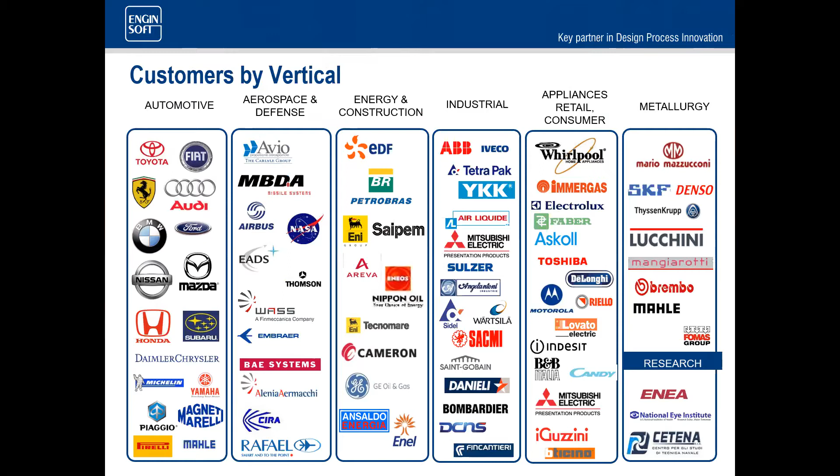So we're experts across dozens of industries. We have multidisciplinary competencies and added value services, best-in-class technologies and technological transfer, training, advanced on-the-job and support, research partner for academia and government, technological transfer projects in CAE and virtual experimentation sectors.

So some of our skills are fluid dynamics, fatigue and durability, crash and fast dynamics, process simulation, mechanics, high performance computing, tolerance analysis, environmental and vibroacoustics, multi-body, and optimization.

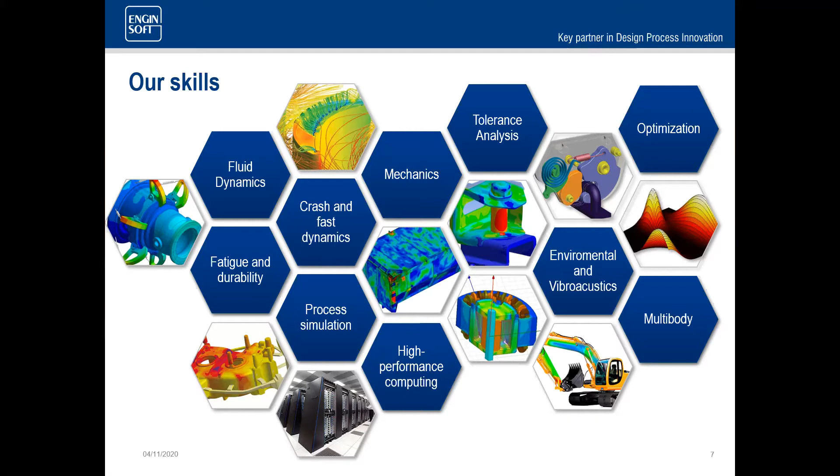So I think a little bit of a change in the schedule. I'm James Christ. I'm a senior application engineer for EnginSoft. I do a lot of our trainings and a lot of our level 2 support for Particleworks and a few of our other products. I'm going to be doing the overall slide deck, and then Chris Garcia is going to take over. He's one of our application engineers. He's going to do a live demo and show you what the software looks like and what the workflow is like for these types of problems.

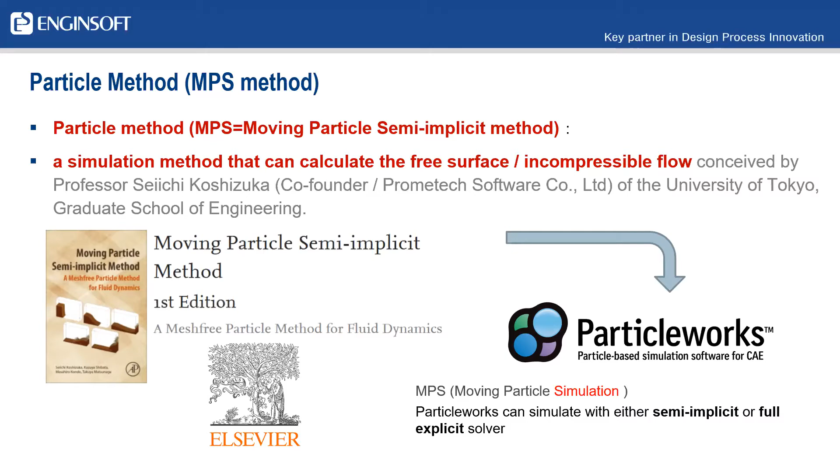So a little bit of history: the method came out of the University of Tokyo in the mid-90s, and then the person who worked on the original method went on to found Prometech, the company that manufactures and updates Particleworks to this day. So we're the only people on the market that are using this method.

Now to dive into some of the details on why it's different. On the conventional CFD side, we typically use an Eulerian approach, right? So we have a fixed grid. We might change that grid every couple of time steps if we have a moving grid type problem, but the important thing to remember is the connections between any calculation nodes are going to be essentially fixed, right? We have these lines representing how these nodes are connected, and those are going to be relatively rigid.

And then we attach calculation nodes to points in space and evaluate whatever properties we're interested in over time at a location in space. The particle methods that we're going to be talking about today, so MPS and SPH, which I'll touch on in a second, both use really the same discretization scheme. So they are Lagrangian methods.

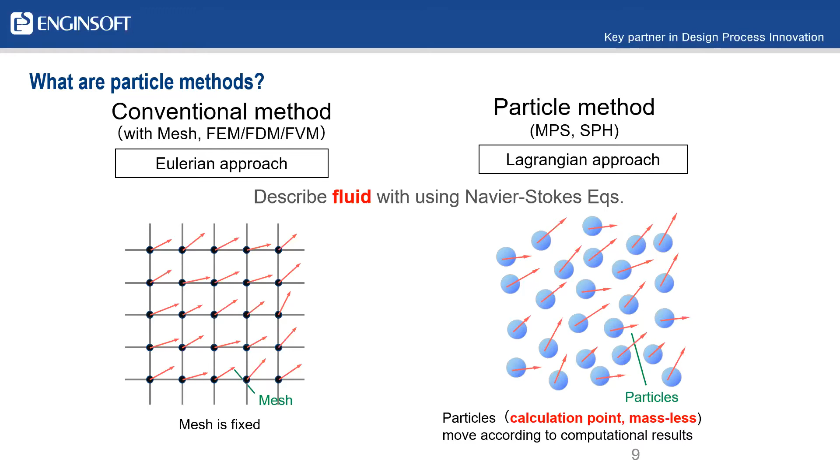They directly discretize fluid. So it's kind of like you discretize the actual volume, and then you track that volume or clump of fluid as it's moving through space. And then the calculation nodes define where your fluid is. So they're very natural ways to deal with free surface problems and sparsely populated domains in particular.

Now, once I go through that slide, the next question people inevitably ask is, well, this just sounds like SPH. I know what that is. Why is this different? And I think the best way to go over that difference is to go through the history, because that really explains where those methods came from and why they need to be different.

If we look at SPH, smoothed particle hydrodynamics for those that might not know what that stands for, it was originally developed in the 70s for the astrophysics community. So they're interested in problems like solar system formation. You might have at the beginning of the system a continuous distribution of gas, and it's going to eventually collapse down into stars and planets, right? And these problems can be modeled as highly compressible fluids.

So what they've done for SPH is they have these particles or calculation nodes that define a distribution of mass. And this is kind of what this image is showing. So it's almost like a stochastic method, right?

You have this particle and it represents almost like a cloud of fluid or dust in the astrophysics case, but it can be used for any really highly compressible fluid. And what they do is they solve this system over time. They evaluate where these particles are, and then to evaluate the end result, what you do is you take the superposition of all of these distribution functions, and that gives you a distribution of density across the domain.

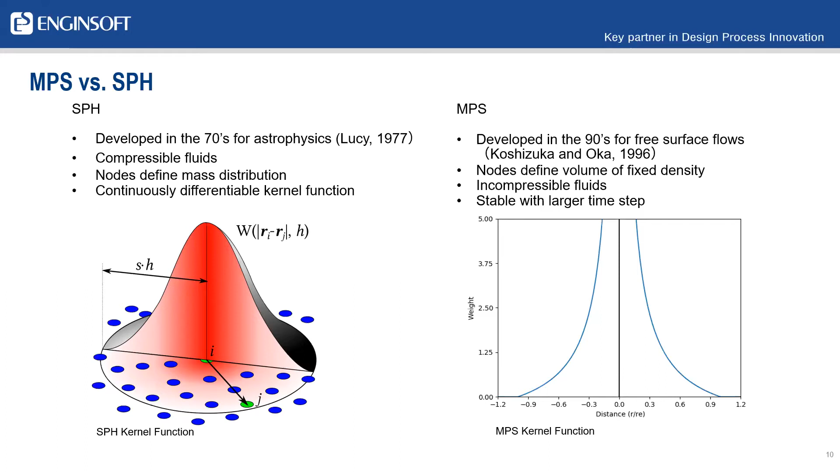Now, what does this look like for a more realistic example? Well, realistic as dam breaks, right? So I'm sure you've seen this example. We start with a volume of fluid here, and then we progress it through space. It's the quintessential first tutorial everyone does. And the difficult thing about doing this type of problem with a conventional tool is that you still need to discretize everywhere that might have fluid. So we end up with a bunch of elements here, and at every time step, they're just going to say, hey, the volume fraction is 0. So it's kind of a waste of computational resources in a sense.

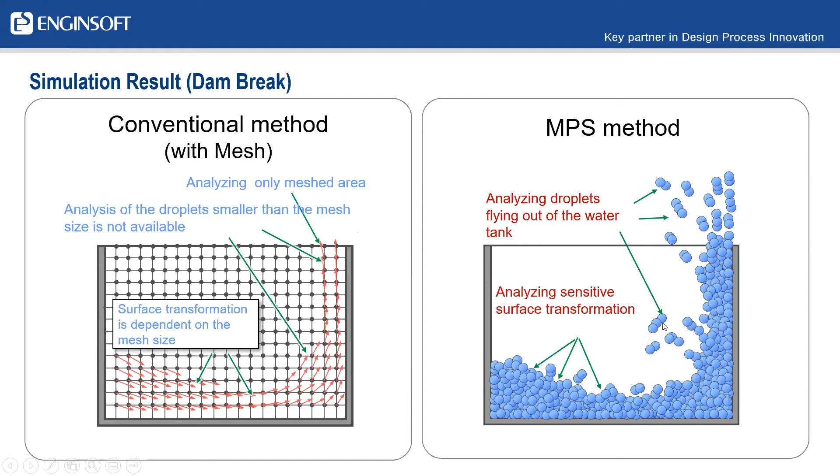And another thing is, before we start the simulation, we might not know how much splashing we're going to get and whether fluid is going to escape this container. With a finite volume code, you need to decide that in advance and discretize up. With MPS, you can just draw a larger domain, but you're only paying a computational cost for the amount of fluid you have and the size of the particle you're using. So you can draw an arbitrarily large domain and not really pay a computational penalty for doing so. You can also a lot of times use a finer resolution and have that resolution continuously throughout the domain. So some of these small features we might not have discretized small enough on this side, but we're able to resolve those features using MPS.

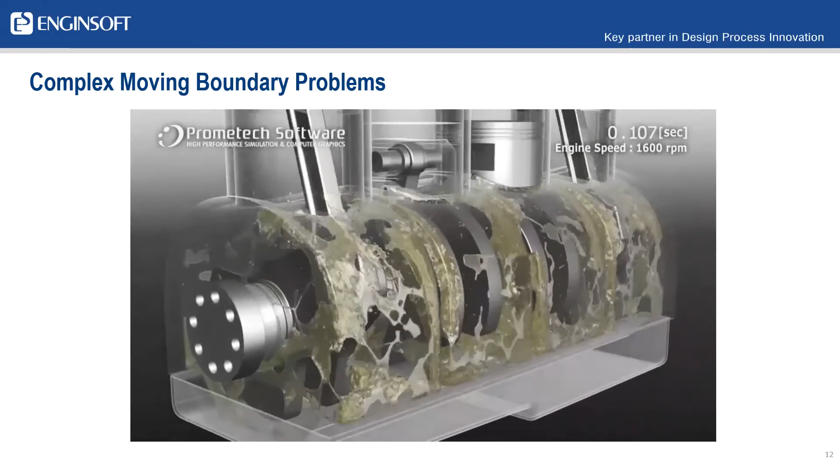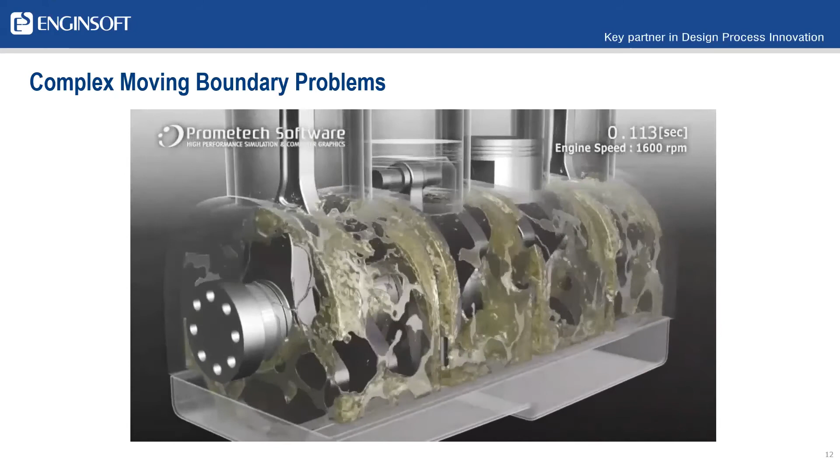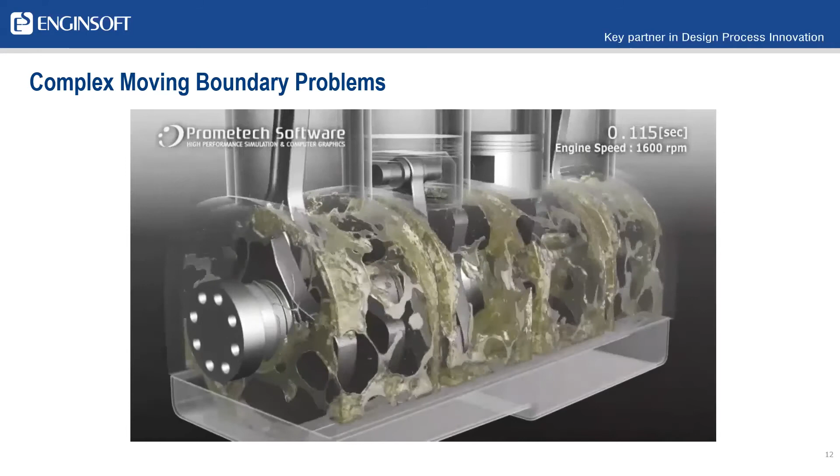Now, when we put all of this together, the really nice thing that comes out of it naturally is that we're able to deal with moving boundary problems very naturally. So because we don't have to deal with a changing grid over time, we can just say, here's a particle, here's a wall, if that wall moves, it's just going to apply an appropriate repulsive force to the fluid, and it's going to move appropriately. So there's really no additional effort required, either computationally or from the users. On a user side, you basically just tell the system, hey, this is moving, maybe it's rotating this fast, and that's about it.

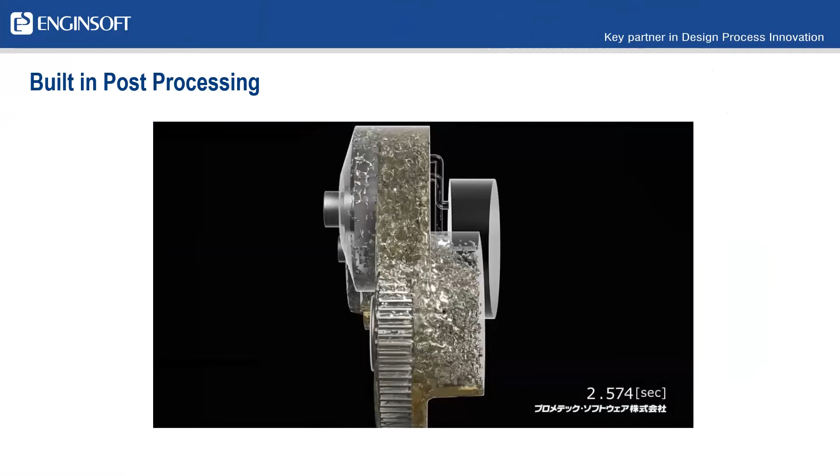And one thing I always mention, because I get this question quite a bit, is what does the post-processing look like? And that's completely integrated within Particleworks. So it's not like some other tools where you need to have a solver in one spot and then use a separate tool for post-processing. And sometimes that can create workflow issues.

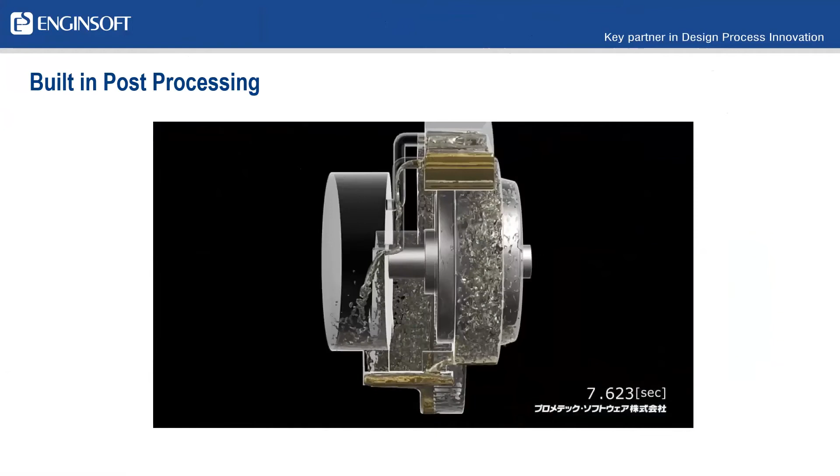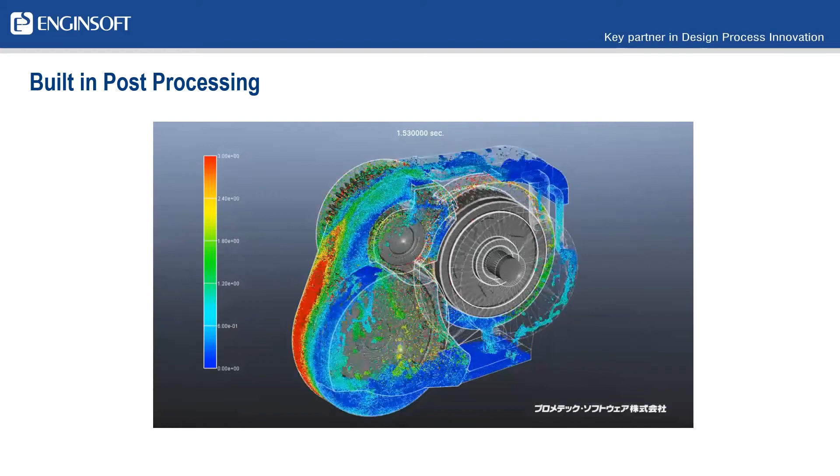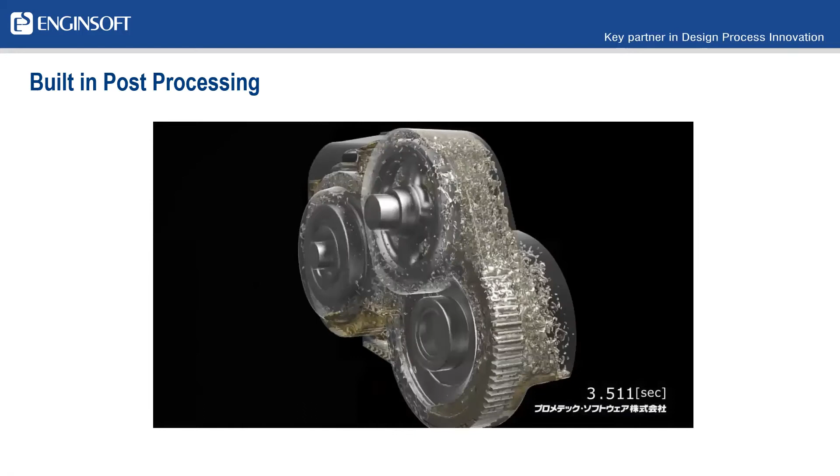There's built-in post-processing. And I think in the video that was playing before we started, while we were waiting for people to trickle in, it was mentioned that Prometech does advanced rendering, and that's actually a module that's available now. So you can basically export simulation results to an animation program like Blender, which is free, or 3ds Max or Maya. I think those are the two professional ones. So maybe your marketing team wants to use these to sell engines.

Now, where is Particleworks used? I guess the biggest sector, I would say, is automotive, and that's kind of what everyone is here for today. You might have friends in some of these other industries, and we do see use in quite a few other industries. Anywhere where you have an incompressible fluid, anywhere where you have complex moving boundaries, these are all areas where Particleworks can make a lot of sense as a simulation tool.

Okay, so now we've got kind of the foundation out of the way. We can move forward. We can march ahead and talk about the thermal modeling approaches that Particleworks has.

So I do actually see a question in here in the chat, so I can answer that now. So looks like Anthony asked, what are the geometry requirements for rotating moving meshes? And that's one of the nice things, is we just bring in an STL. And then Particleworks has a pre-processing step that's completely automated. You basically just tell it, run the pre-processing, and it converts that STL into what we call

a distance function. It's similar to that kernel function I was talking about earlier, where you basically have a curve describing how strongly a particle is going to interact with another particle. Very similar thing for walls. So Particleworks converts that STL geometry into a distance function, and beyond that, there's no other geometry requirements.

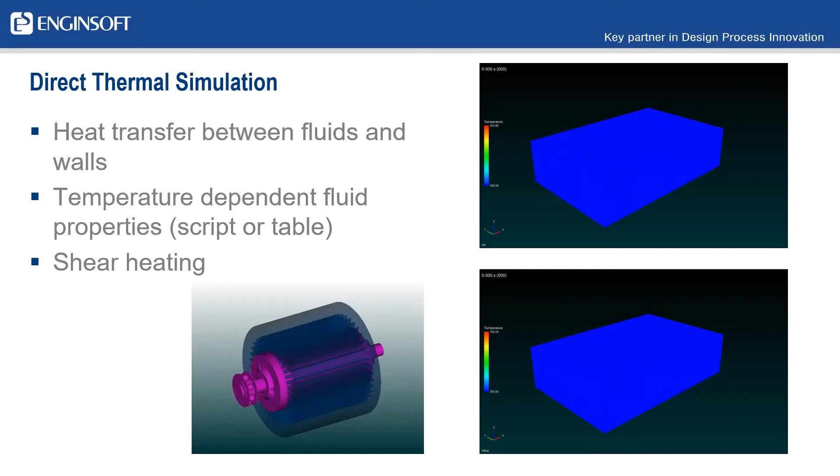Okay, so different thermal approaches, right? We can do direct thermal simulation. We can do heat transfer coefficient simulation and then export that to a dedicated FEA tool. And then we can do internal conjugate heat transfer. So I'm going to talk about each of those in turn. Going first with direct thermal simulation.

Let me restart these videos. So this is an e-motor cooling example that we have. This is actually, I believe, from one of the case studies I'm going to be talking about in a moment. Well, let me start these up again. So one of the things that we can solve as a parameter for each particle, or as a solution output for each particle, is the temperature.

So what we can do is turn the thermal solver on, specify some thermal boundary conditions like the initial temperature of the fluid, the initial temperature of geometry as an example, and then we'll get heat transfer from the walls of the geometry onto the particle, or cooling as the case may be.

And what we're seeing on the right here is an example where instead of using that distance function I described, we're using actual particles to represent the geometry. This use case isn't as common anymore, I would say, especially with the new conjugate heat transfer solver, but this does a really good job of showing how the particles can change temperature over time. So what we do is we spray a cool fluid onto a hot set of particles, basically, and then heat is transferred from these hot solid particles into the fluid, and we see that temperature gradient happening.

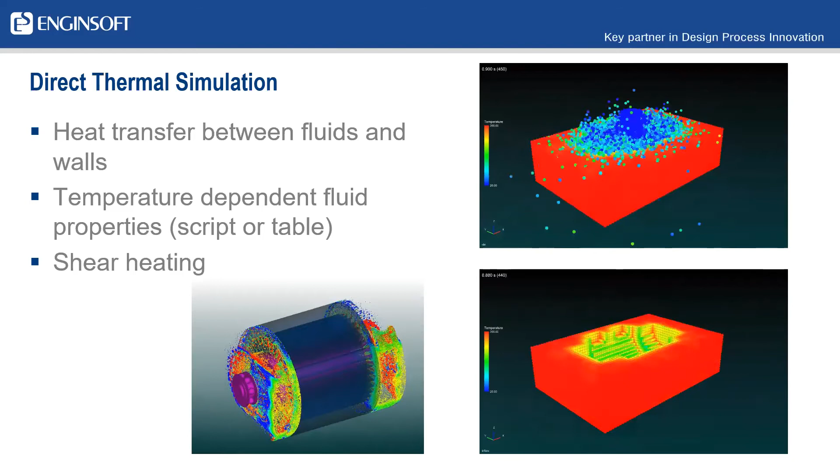Okay. So the other option that we have is probably today the most commonly used approach. So one of the issues that people run into when they're trying to do the direct thermal simulation is that the time scale that you care about for fluid quasi-steady state versus thermal steady state is going to be different, right? You might have a gearbox that has a pretty consistent flow pattern on the order of 5 seconds, but the temperature isn't going to stabilize for half an hour, just as a wild example.

So in that case, you don't want to run the whole fluid simulation for half an hour. Running in 5 seconds might give you enough directional data on how temperatures are moving, but it might not. So you have to make the engineering judgment call as to whether those timescales are appropriate.

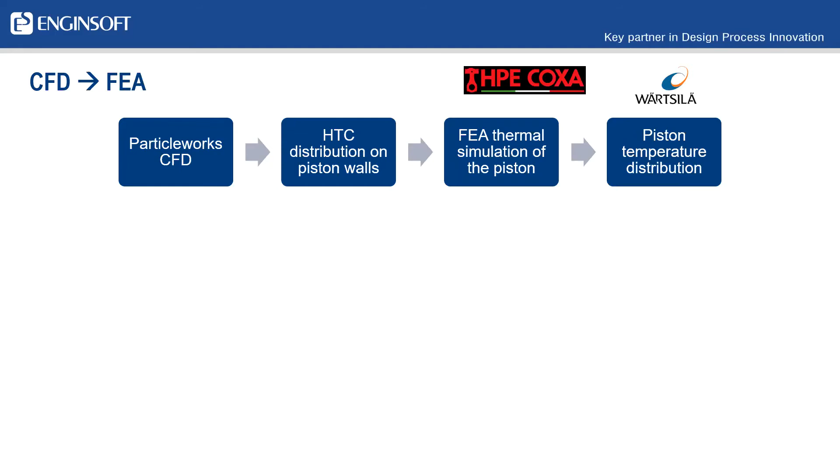In cases where those timescales don't match up and it's not feasible or time efficient to do the direct thermal simulation, what we do instead of directly solving for temperature is solve for heat transfer coefficients and then map those onto the walls. That's what this case study was doing. In the piston gallery, they solve for heat transfer coefficients, map them onto the gallery walls.

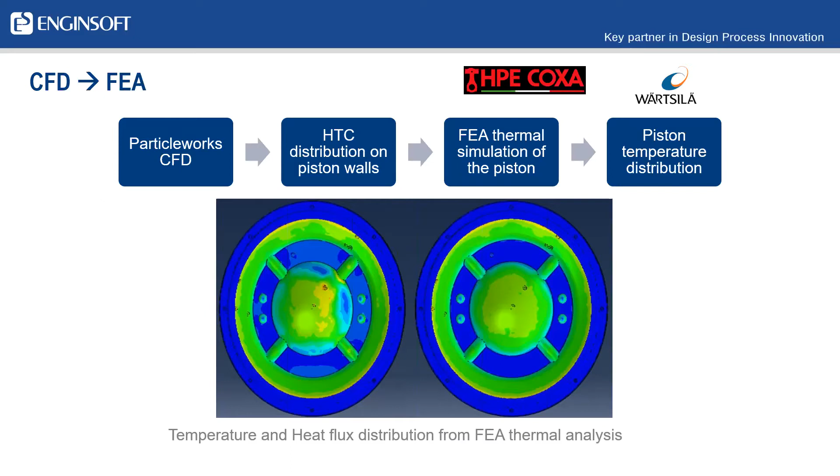Then they can take that mapping and use it as an input into an FEA thermal model. A lot of our customers are doing Particleworks and then ANSYS Mechanical. Any thermal solver can take our input data, it's just a CSV file, and they'll be able to do oftentimes a much longer timescale simulation very quickly. Those are often steady state simulations that run pretty quick, and you can split up the system and let each solver do what it's best at.

This is a really good graphic of what these types of simulations look like.

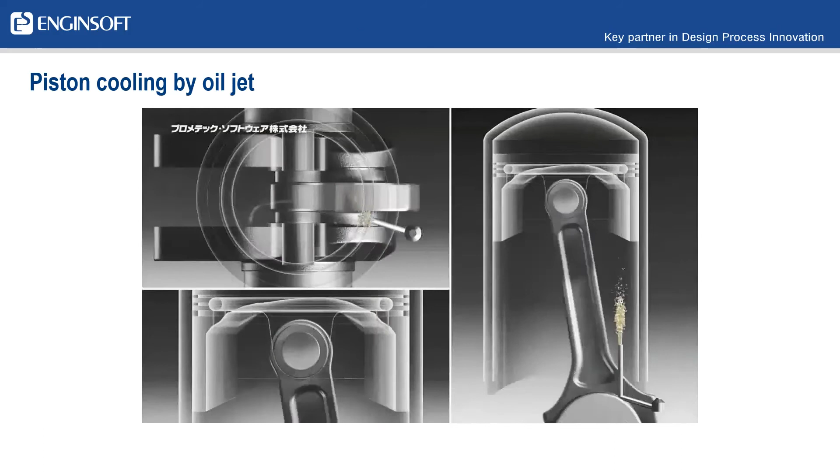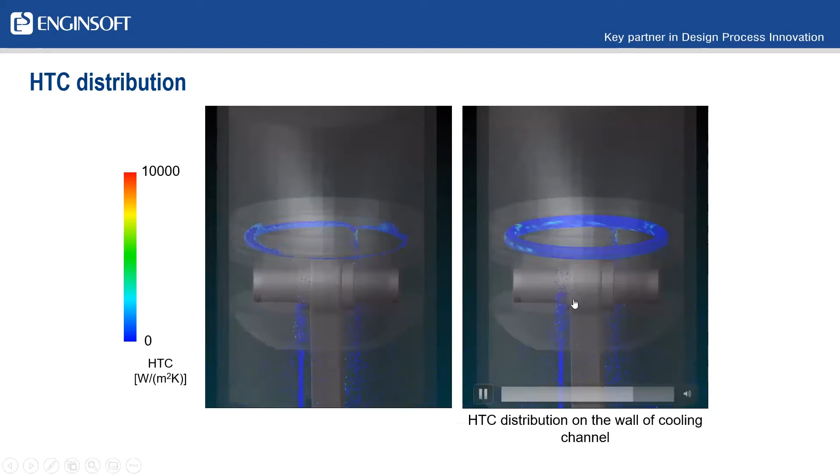So what we've done here is fixed the camera position to the piston, keeping it centered front and center in the camera. On the left, we're looking at the heat transfer coefficient on the particle itself, and the right image is after we map that onto the surface, the inner surface of that gallery. I'm not sure how well this is playing, it's getting a little choppy on my end. Let's move forward.

That workflow is possible with any thermal solver because we just give you the raw output that you need - the position of a given measurement and then the value. You can map those into any FEA mesh that you have.

For our ANSYS customers, which I know a lot of you are, we have a direct plugin that makes that workflow a little bit easier. You can basically set up Particleworks inside of Workbench. There's a module for it, then you set up your Particleworks problem, and you can just draw the arrow from the Particleworks block over to the ANSYS Mechanical block, and it'll bring everything over, saving you a couple of steps. If you're doing it every day, or this is all of your simulations, then it's often a good workflow time saver.

The same thing can be done, I'll mention it because it's on the slide - you can do pressures as well, in addition to mapping the heat transfer coefficient.

Now, when we're doing all of these heat transfer calculations, the default that Particleworks has, and this was the only way to do it up until the most recent version, was to use a default Nusselt number correlation based on flow over a flat plate - parallel flow parallel to a flat plate. That was for both laminar and turbulent flow, there's different correlations, but those are the assumptions that were being baked in. Now, let's say you have either institutional knowledge or maybe your problem is just inherently not valid for that correlation.

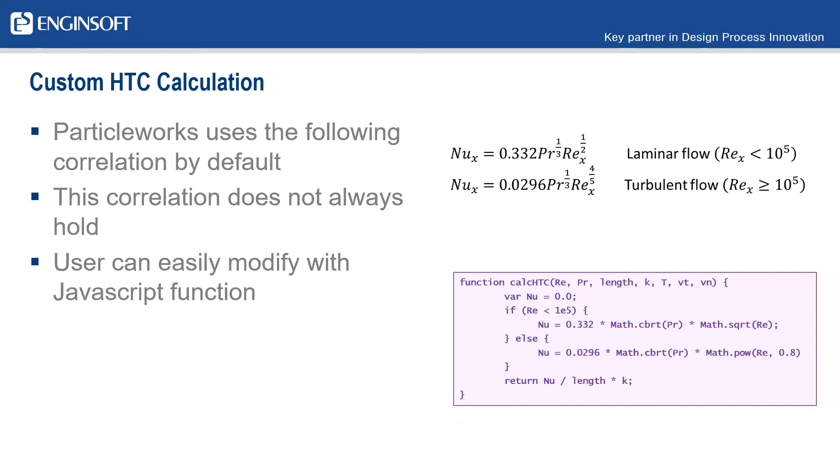What you can do is define your own. Particleworks really tries to make it so that you're paying for the solver, and any input data, you're able to control. They try not to make it a black box, which I really appreciate. All of our functions are just JavaScript, there's no proprietary languages. One good example of when this is applicable is maybe for impinging jet flow.

This is going to have different heat transfer behavior. This compares using the default laminar flow correlation versus using an impinging jet correlation. A lot of these, you might have textbooks or institutional knowledge for what correlations work for your problems, and you have the freedom to do that.

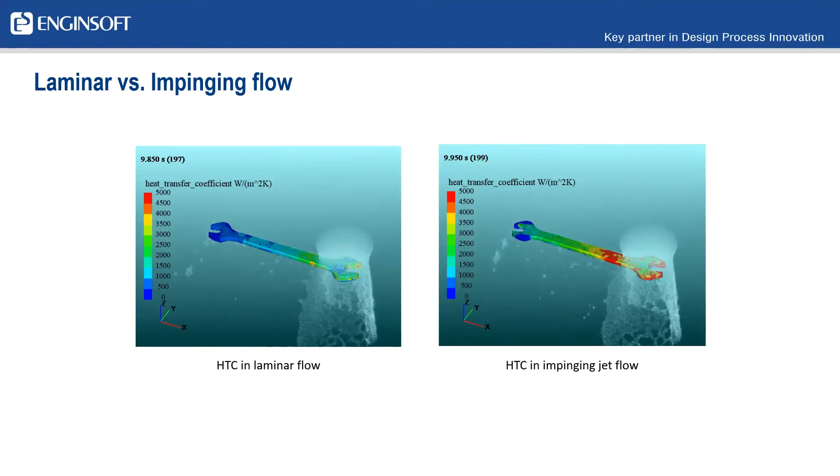Now, this is a very exciting functionality. It was added in the most recent version. We're really excited about what our current customers are going to come up with using this feature. I think during the CAE conference, we're going to have at least one presentation talking about use of this in the wild.

So what we do for conjugate heat transfer—let me step back. Normally when we're using these distance functions, they're pretty simple boundary conditions. You can set a temperature on them, but you're not really resolving any interior space for them. But what we can do, when we're using a conjugate heat transfer solver, is discretize the entire domain into a fixed grid.

So this is a two-dimensional slice of what this looks like. We can set the size of these cells independently from particle size, but it's going to fill the domain with these voxels, as they're called. Then for each voxel, the solver evaluates the volume fraction of material versus empty air, what the surface area of it is, and from that information it's able to pass heat from particles to these voxels or cells, and vice versa.

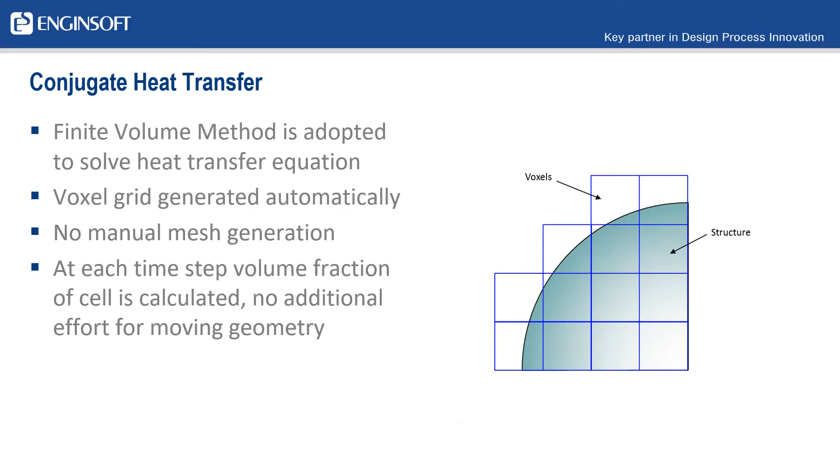So the first one I wanted to touch on is drive system design. They were working on an e-motor with some of our Italian counterparts, and they wanted to evaluate thermal performance because, as the e-motor folks on the call are familiar with, performance and efficiency is tightly coupled to operating temperature. So what they wanted to do is incorporate these moving boundaries—you have the moving rotor and some complex geometry that can be difficult to mesh.

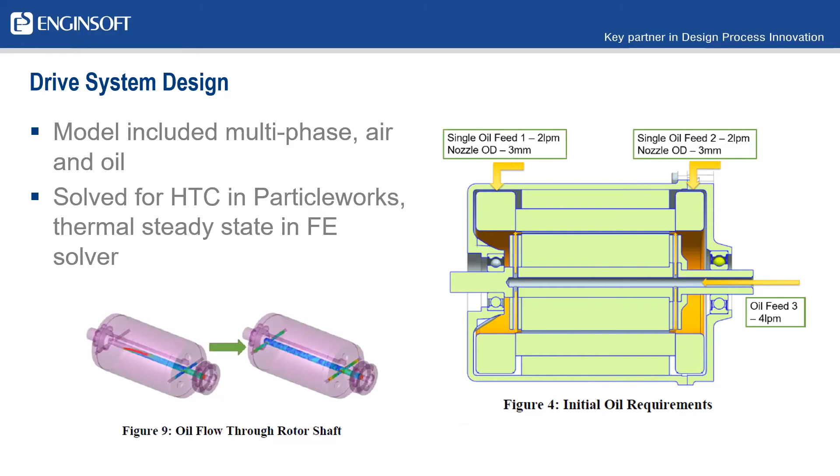They set this up with the help of our counterparts and were able to evaluate the thermal performance. They used the approach we talked about earlier by solving for heat transfer coefficients in Particleworks, then moving those over to an FE solver. And they found excellent results.

And there's going to be a similar presentation given at the CAE conference from Ricardo. They're going to be showing an example of what they're using Particleworks for on their e-motors.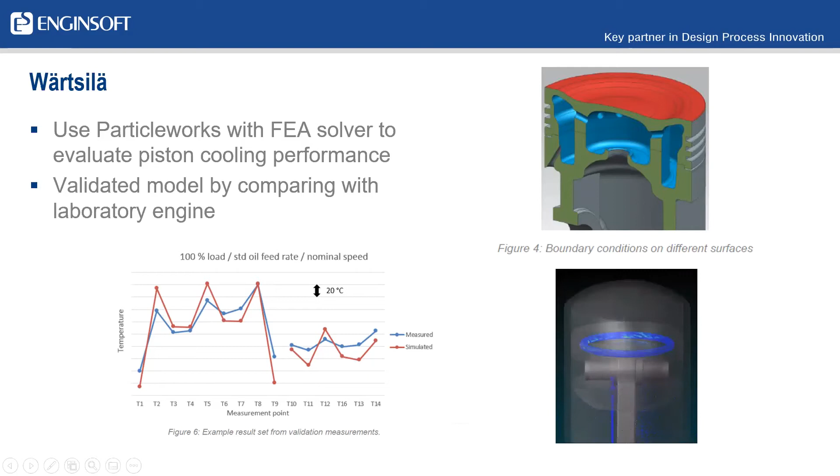By the end of writing their paper, they were already talking about using Particleworks on their actual pistons, and they identified some problems they were going to have with one in-design piston. They were able to take corrective action, check that it was going to work in Particleworks, and fix the geometry before it goes into production.

They also did a comparison between MPS, or Particleworks, and a VOF method, that's volume of fluid. Again they found a very similar trend to comparisons with finite volume, that the time difference in calculation is pretty massive, and the computational requirements tend to be a lot lower. You can see 160 cores versus 12 cores, and 5 versus 24 hours.

The other thing I wanted to mention is that Ducati is going to be presenting something very similar, their application for Particleworks in piston cooling, at the CAE conference.

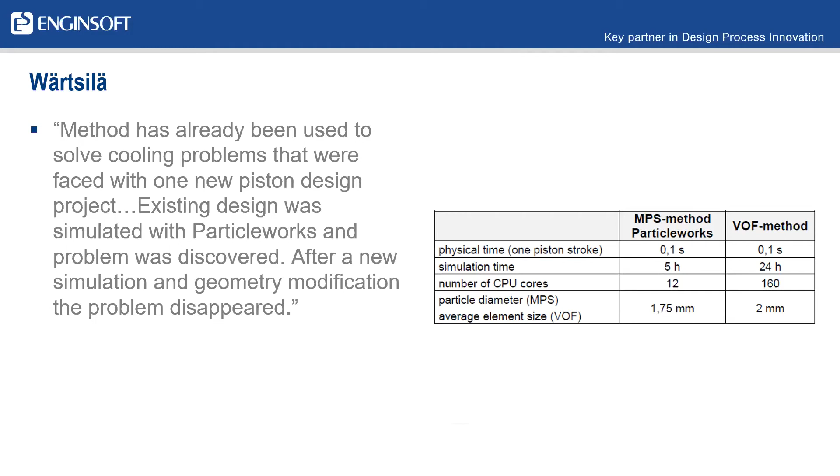With that, I'm going to pass it over to Chris Garcia, and he's going to show you around the software interactively a little bit.

Hey, real quick, I got a question for you. Is there a limitation on model geometry size? There is not. Okay, just wanted to clarify that for everyone. Thank you. Absolutely.

All right, and while Chris is pulling that up, perfect.

Chris, if you want to pull in the geometry, Particleworks brings in STL and OBJ geometries, so you can export those from any CAD program. We always recommend that people don't do geometry simplification. It's not necessary with the preprocessor that we use, and it's going to increase the speed of your workflow a lot by not having to do that tedious step.

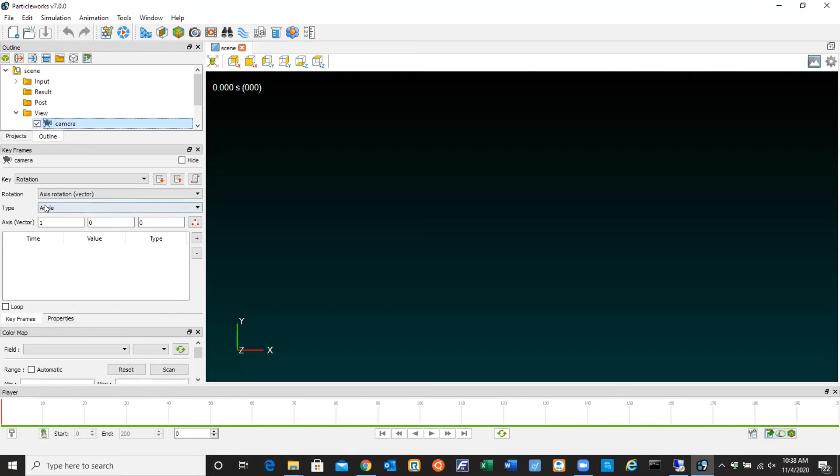Yeah, that's actually a good segue, James. Let me just make a quick adjustment so I can make my work a little bit easier. But like James mentioned, there's no special step we need to take in bringing in geometry. So let me go ahead and just bring in some quick geometry. This is going to be our piston geometry, and like James mentioned, this is going to be a moving boundary problem.

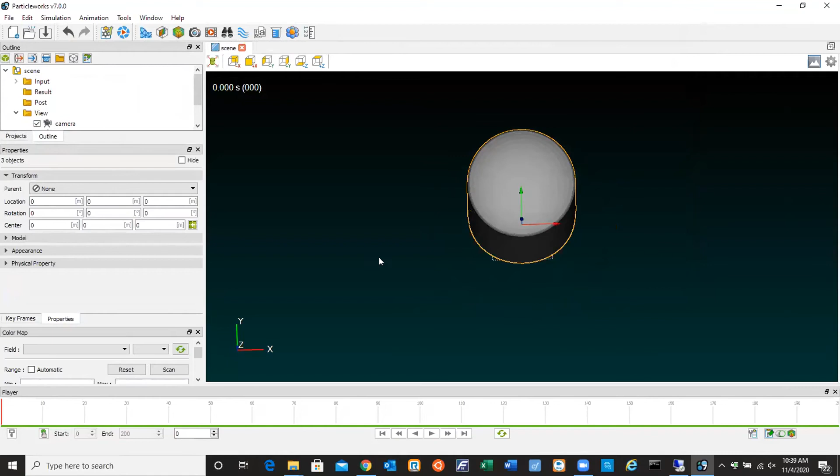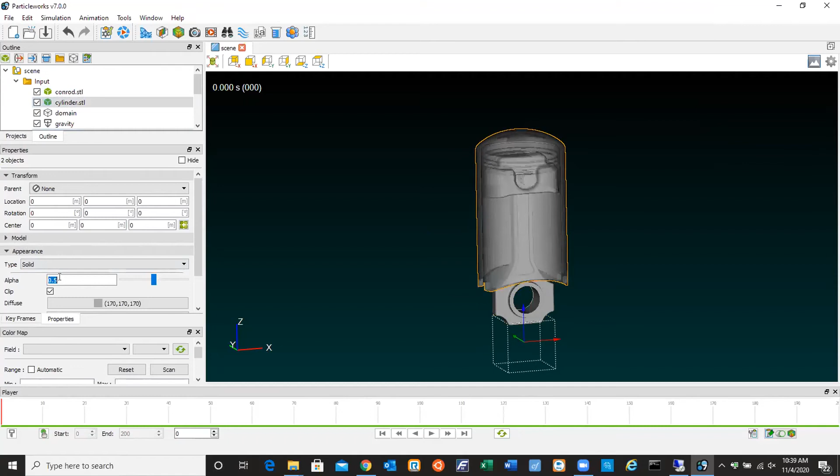Just like that, we've already got our geometry in. I don't have to do anything special. The only thing I have to do is make things a little clearer so we can see what's going on. I know that's always been one of the biggest things I've come across in industry, how can I see what's going on? Well, here we go, now we can see it. This is a pretty cool trick.

One thing I really enjoy about Particleworks is that bringing all this stuff in is very easy, and manipulating how we see things is very, very easy. I do appreciate the hard work that all the guys in Japan had done, it makes my life a little bit easier. So let me just change some physical settings here for a second.

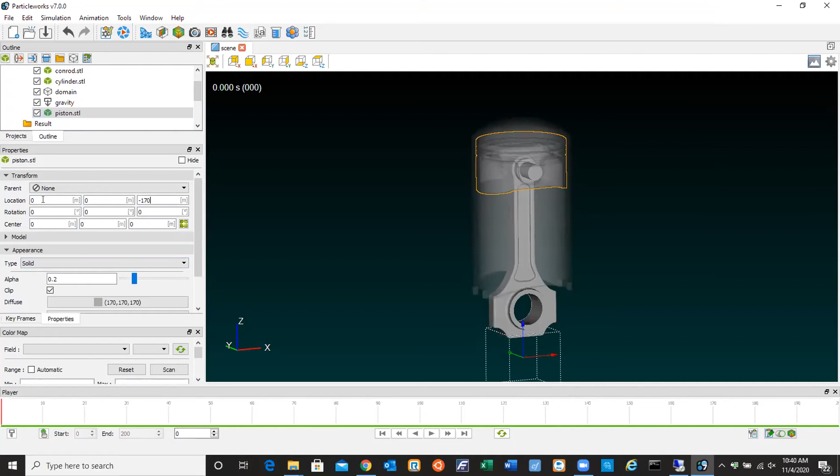So while Chris is kind of setting up the moving portion of the moving boundary problem, I'll talk a little bit about how we do those. So we use this concept called keyframes, and what that basically is, at a given point in time, we're going to specify this is how fast this thing is moving in some direction, or this is the position that it has, maybe the rotational speed that it has, and we can stack relative motions.

So you'll end up seeing Chris create some basically dummy groups, and that helps us basically connecting two parts. So you can have motion on one component and then motion on another component that's relative to the first one. So that becomes pretty necessary when you're doing these somewhat complicated motions for a connecting rod and the corresponding piston.

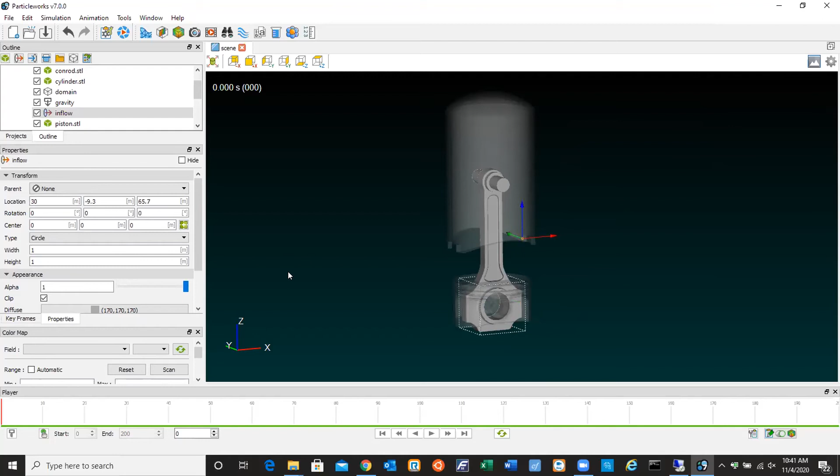It's relatively straightforward to set up. You basically just have to specify this is going to be moving up and down, this is going to be moving side to side, and like anything, there's always a couple of different ways to do it. Yeah, that's a good point. And I'll get there here in a second.

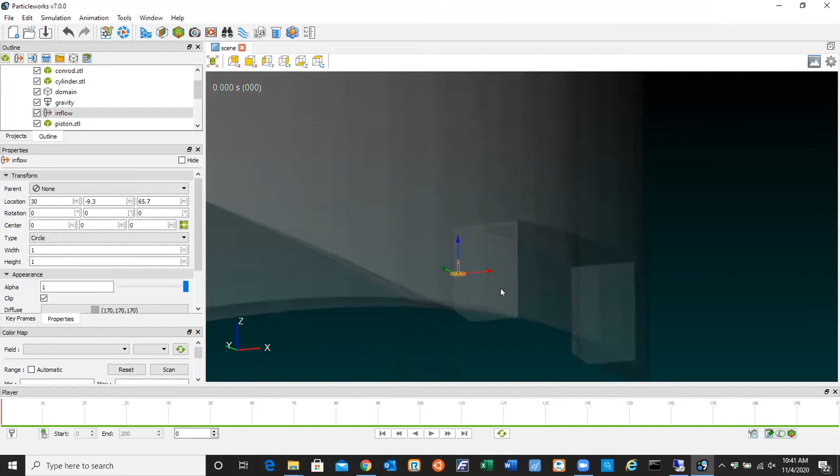Before I get to the animation and stuff, one thing I'd like to point out is kind of referring back to James's original introduction slides about having to figure out where the particles are going to exist in this domain. I have no idea where these particles are going to be shooting in this domain. In fact, they're going to be coming out of this little inflow here, but I have no idea where these things are going to be coming from. So the only thing that I'm going to do is make sure that these particles exist inside of this domain. So I'm actually going to increase this domain size a little bit.

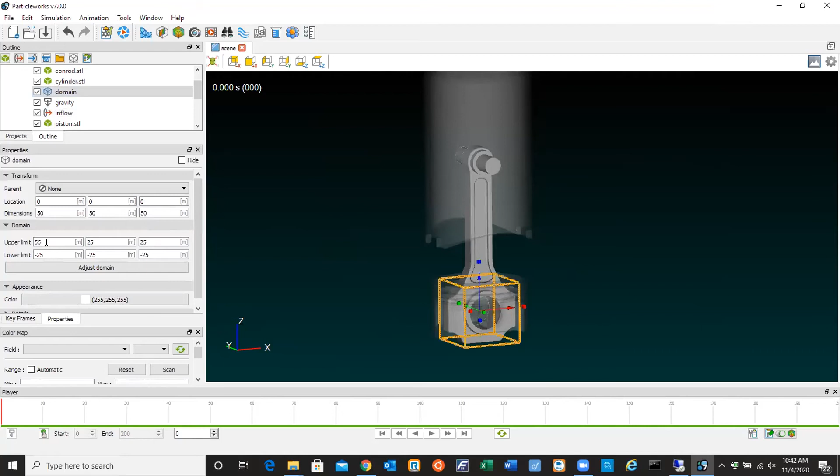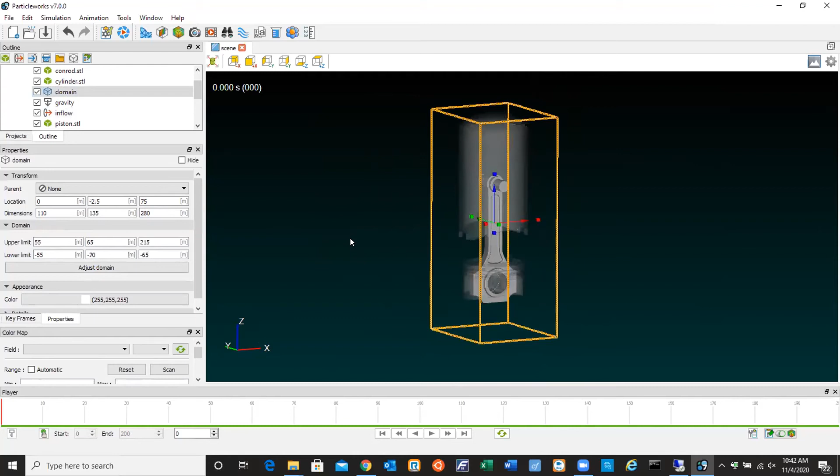And just one more time for emphasis, I have no idea where these particles are going to be shooting out of. I have no idea where they're going to be traveling. So I'm just going to make my domain large enough to where my particles exist within this system here. So at no point have I spent any time messing with any mesh, figuring out where stuff is gonna have to be. And I know from previous working experience, sometimes that stuff can get pretty tedious. So there's a great advantage. One of the things, again, I really love about Particleworks.

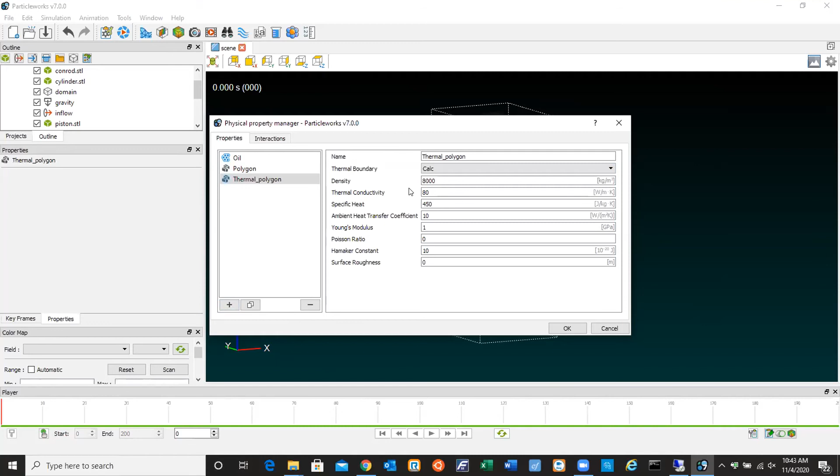I'm going to go ahead and kind of create some oil and wall properties. And this stuff is really easy to define. Go ahead, James. So the domain, it can be sized pretty much arbitrarily. One thing that it does is it really just acts as a pseudo outlet. So any particle that travels outside of the domain is going to be removed or deleted from the system. That can be really convenient just to avoid having to create your outflows. If you have one spot where everything's going to leave, you can just chop the domain there, and then particles will automatically be removed.

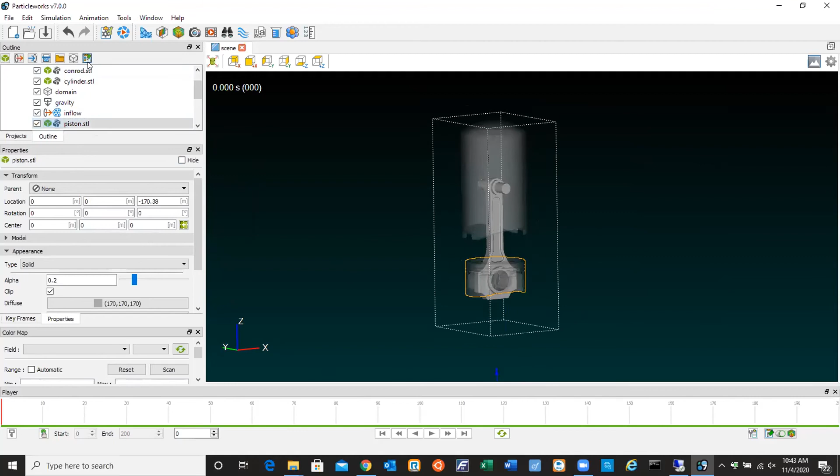Yeah, I know that comes in handy, especially when we have some large models and we don't really know where everything is. So we can set a domain as needed and then go from there. So while James was kind of explaining that, I've already set up some physical properties for our oil, for our adiabatic walls, and our piston, which is actually where we're going to do the conjugate heat transfer and the HTC calculations. I've already set those up in our property managers, and for the piston, I've assigned our thermal boundary and our adiabatic walls here to our cylinder and our connecting rod, and I've given our inflow the oil physical properties in this model.

So just like that, we're halfway through the simulation, and we've been here maybe 5-10 minutes if that. So kind of shows you some of how fast this stuff can go. Obviously, there's a little bit of hands-on that you'd have to do, but it's really easy to grab, and yeah, I really enjoy that.

So I'm just going to kind of do a little bit of physics here. I'm going to define a volumetric flow rate, and then go from there. I'm going to actually change this temperature as well. That way we can actually have some heat transfer going on here. Yeah, a solid half of the time I do these, I forget to set the initial temperature, and then I start previewing results. I'm like, why is everything 0? Yeah, I've run into that myself. You get rapid feedback, so you'll figure out what's going on real quick.

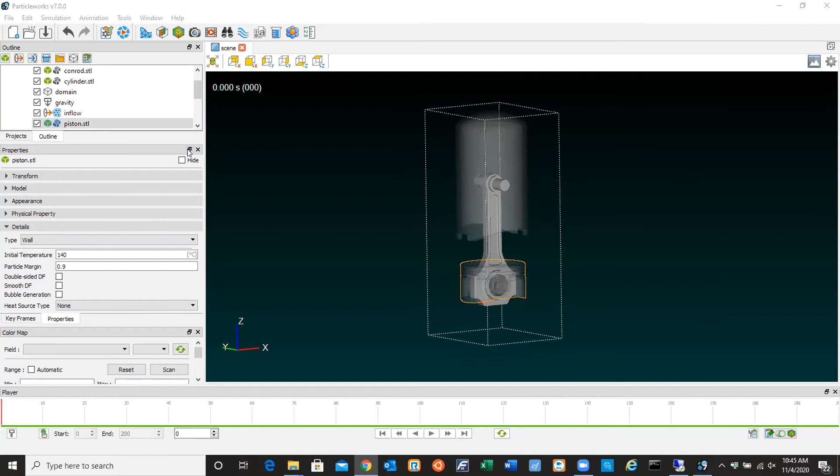So now that everything is set up, now we'll kind of go through some of the animation stuff. Like James had mentioned, you can create a couple of groups, or dummy groups, as I like to call them. And this will basically just kind of group some of the pieces together, and you can do some of your keyframes fairly easy, and you won't have to individually define these as you're working. In this particular model that I'm working on, I've got some sample scripting. These are, again, JavaScript, non-proprietary pieces of information, so these can be shared and whatnot. In fact, let me kind of show you what's happening as I'm entering these in.

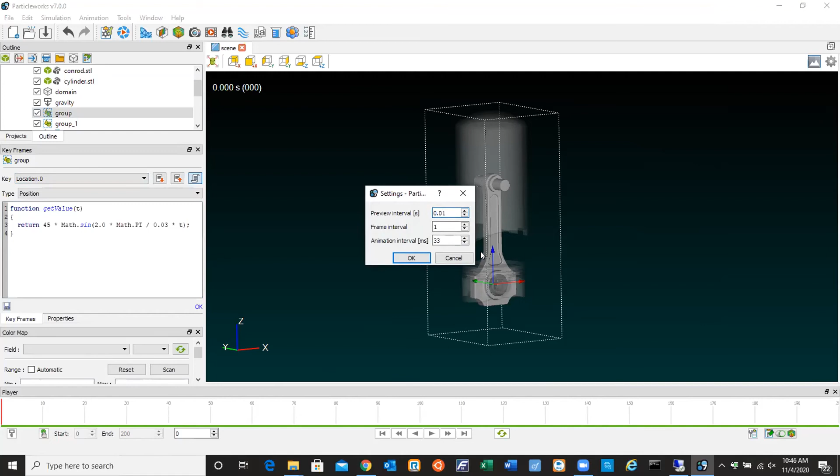So that way we can kind of see what's happening here. And that's still a little too fast. Here, just like that, we've already got a little bit of translation described here. And as we keep going through this example, you'll kind of see all the stuff come together. We're good there.

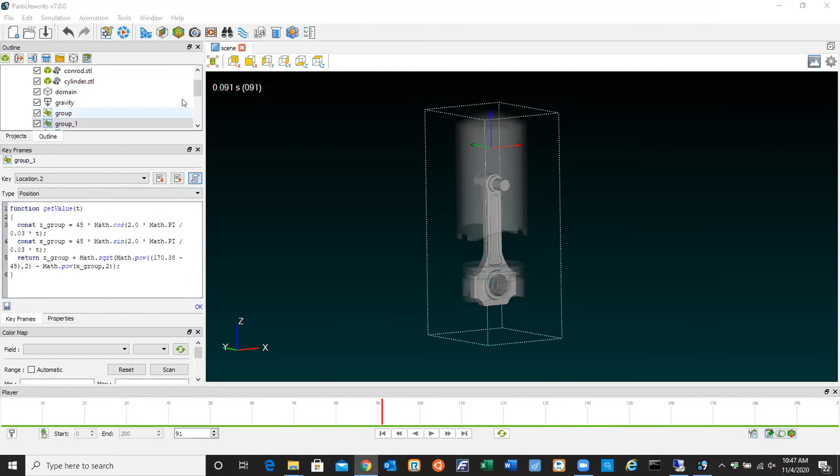Again, I've got some of this stuff handy already, so if you're really good at this stuff, you can type this stuff out as you're going. For this case, I don't want to mess up the presentation, so I've got this stuff handy and ready to go. Change this over to rotation.

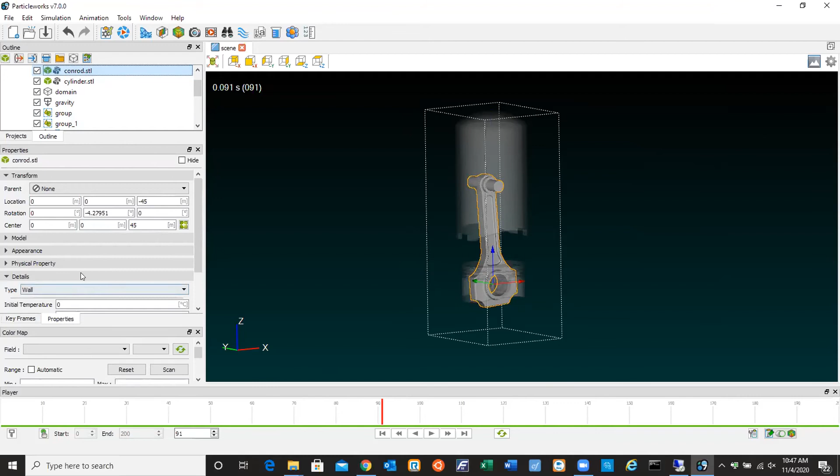Right. And now I'm going to make this a child group. And we're going to do the same thing with our piston. So this is essentially just stacking reference frames relative to each other, and that makes it really easy to set up complex motion. Here we go. Just to give an example, there's some pretty complex motion right there in this piston

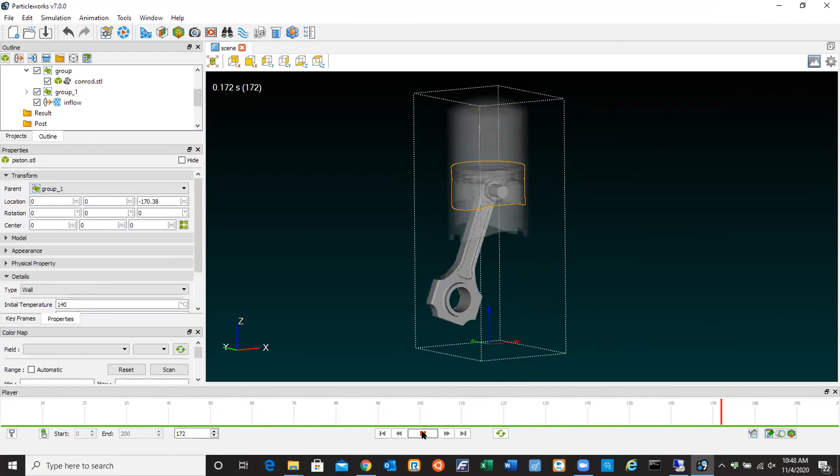example. Yeah, that's the majority of the problem right there. I know that can be pretty difficult to do, especially with moving grids. With Particleworks, we don't have to worry about that. We're good to go. We're gonna make our bosses happy, and I think everybody likes to do that. So we'll be able to get some good results, get them quick, and keep going.

So here I'm just going to define some of our physics modules for Particleworks. A couple of these modules are going to be some of the thermal modules that James was speaking about earlier. For instance, this is going to be the thermal module, and we're going to go ahead and turn on our conjugate heat transfer module. And I also want to turn on our HTC, our heat transfer coefficient.

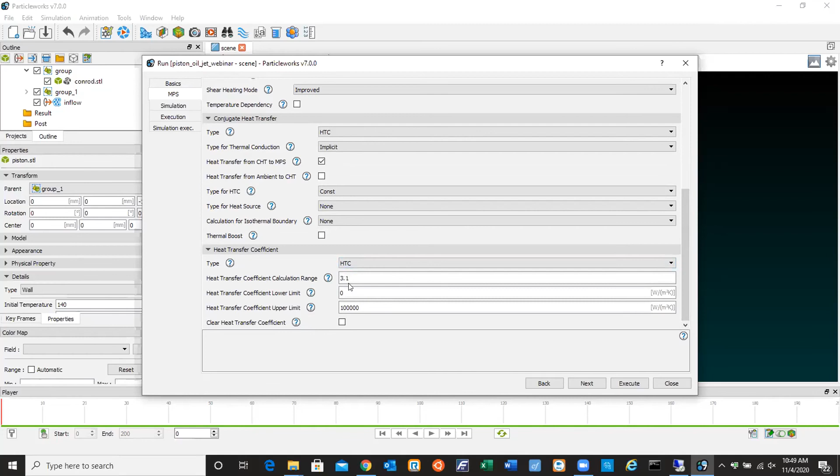If for whatever reason we wanted to do a script, like James was saying, on getting some finer correlations on our heat transfer coefficient, we can do that through the scripting. But for this example, we're just going to keep it simple and leave it as HTC here. And I'm going to go ahead and change some of our simulation times. Get everything set up. Everything is good. I'm going to pre-process and go ahead and start our simulation.

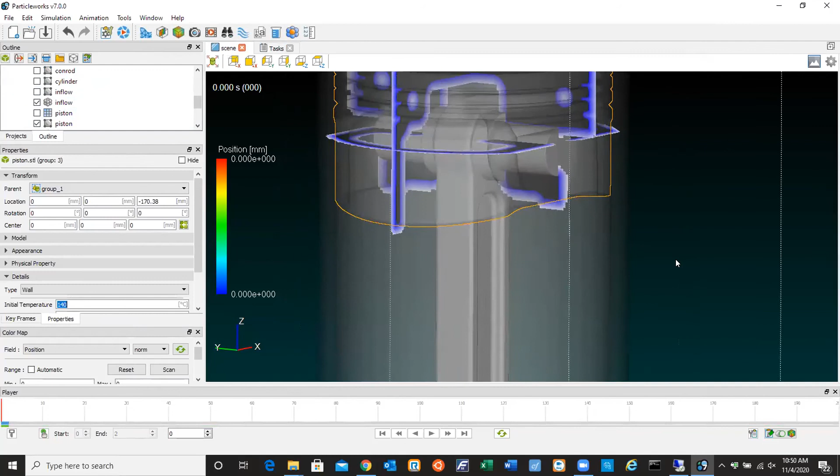Pre-process is what James was mentioning earlier about creating the distance functions between the wall and the particles, and I can actually show you guys what James was talking about. Let's take a look at our piston here. In these blue and white regions, this is what we're going to call our distance function. This is going to be that interaction between the particles and the walls.

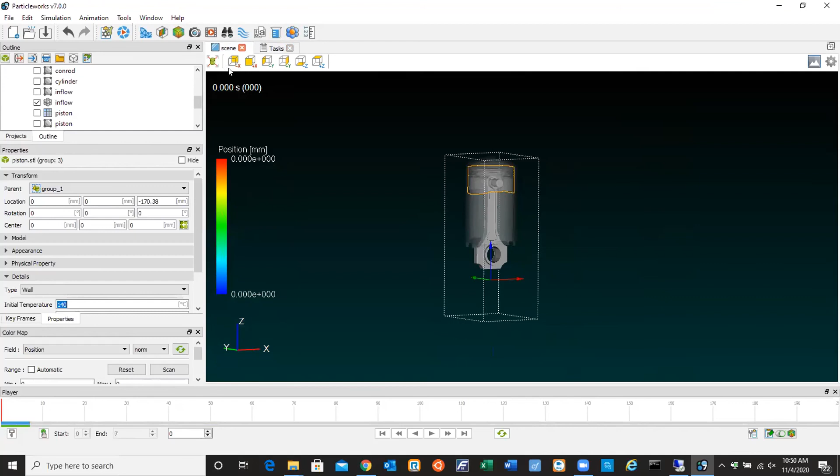So we'll see that this runs fairly quickly. It's working smoothly. And while that's working, I'm going to go ahead and pull up a completed model already, so we can have some interesting stuff to look at while this is running. I actually ran this one a little bit longer. Let me change the camera position, so we can see what's happening. Let's move this to our piston.

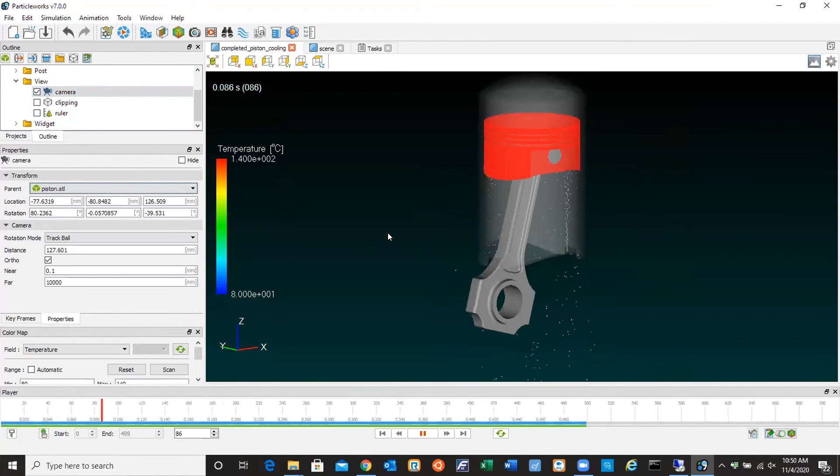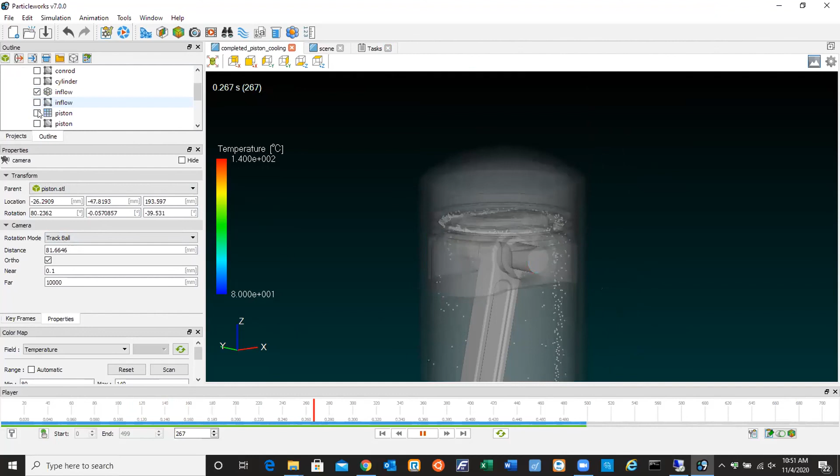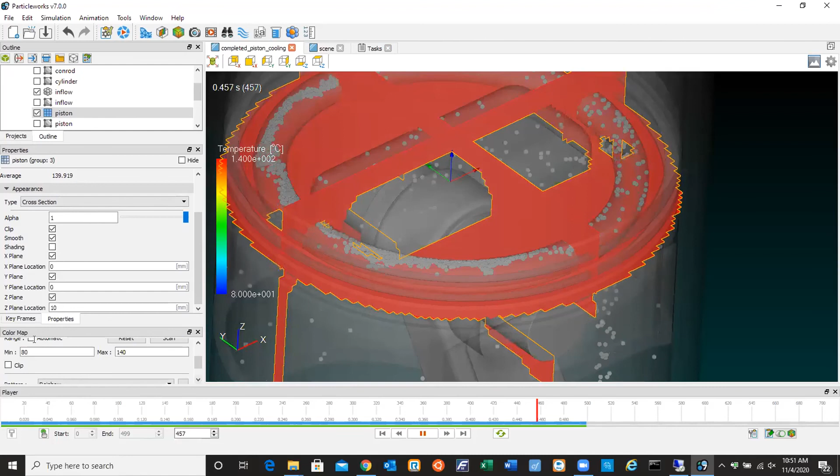In this particular case, I actually used some post-processing tools to get HTC mapping on this piston. Let me turn that off for a second. Here, move this where you can see the piston gallery. We'll change this. There we go. Now we can see some of that distribution in there.

While this is running, James, we can open back up to any questions. Yeah, and I think I have one question. Did you run this on a supercomputer, or what kind of hardware did you need to run this? So I've got just a decent sized laptop. It's a 16 core, 8 gig GPU, nothing too fancy. It's definitely nowhere near a supercomputer, that's for sure. Nothing too fancy on my end, and I was able to solve this in a pretty short time.

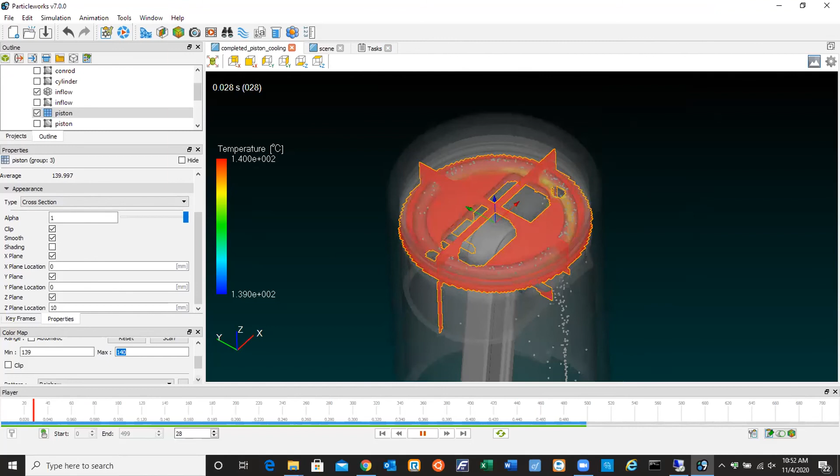Good. So I do see one question about flow through small passages, and that's something that's absolutely doable. It really just comes down to selecting an appropriate particle size so that you're able to resolve that flow. So our typical recommendation is anywhere between 3 particles and maybe 10 or 20 particles across a passage to fully resolve that flow.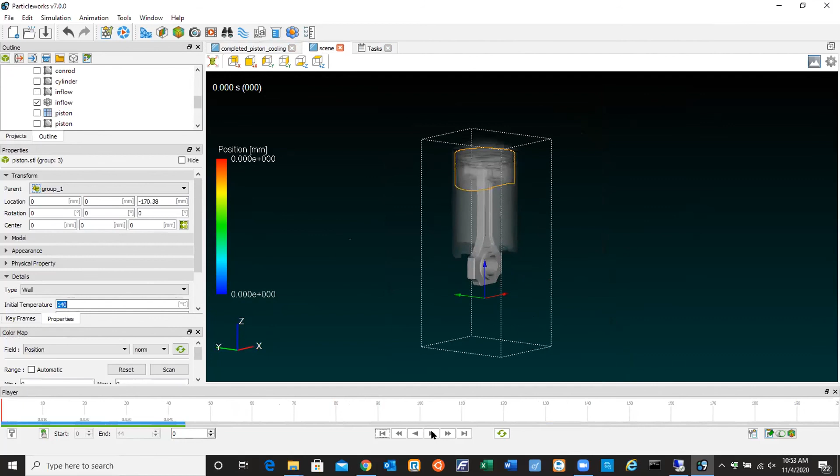And Chris, if you want to switch back over to the one that we had just set up, and folks can see how quickly you're able to get results and immediately get feedback. This has likely been covered, but this question came in through a different chat earlier. I didn't see it right away. How should I approach setting up a thermal analysis problem in Particleworks? I'm sure that's probably what y'all were just showing, but just wanted to make sure that we got that out there.

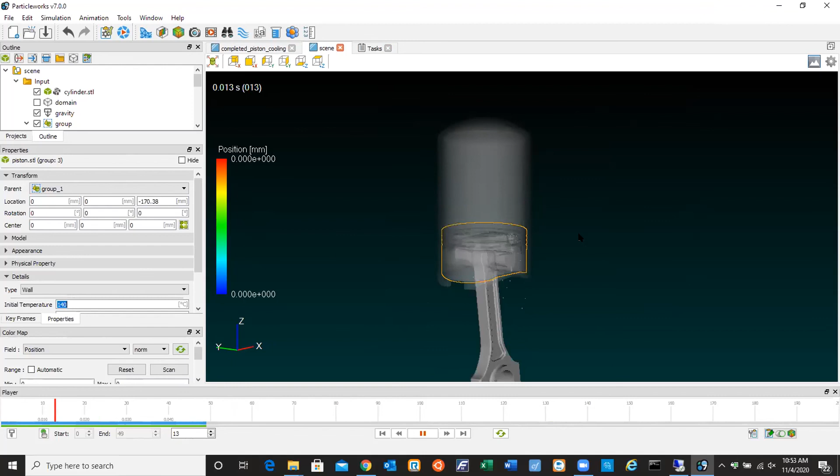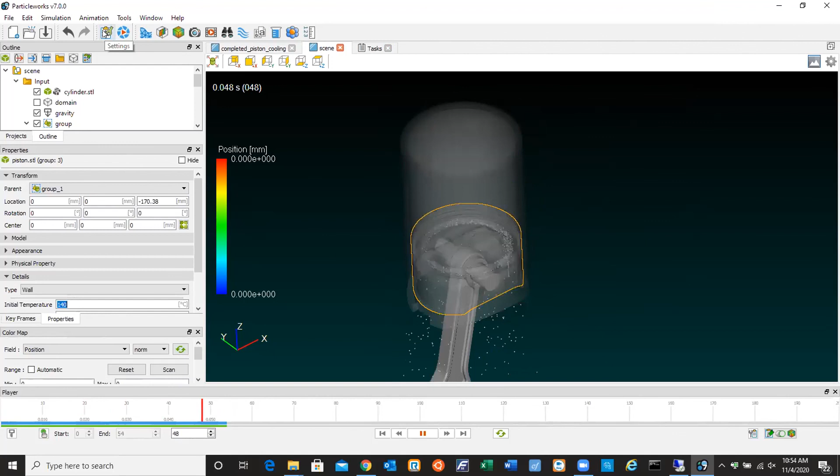Yeah, so there's kind of the three different approaches, and it's going to depend on your individual use case as to which approach is the best, from doing a direct thermal simulation and evaluating the temperature of the fluid versus doing heat transfer coefficients and then an FE simulation, or doing direct conjugate heat transfer. So the setup is relatively similar for all of them. You just have to basically check the checkbox for include thermal solver output. But then actually choosing which approach is the best is something that we do on more of a case-by-case basis. Thank you, James.

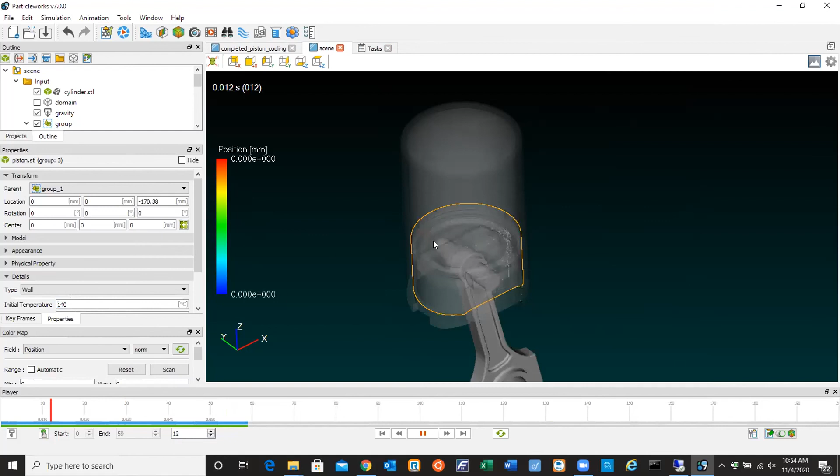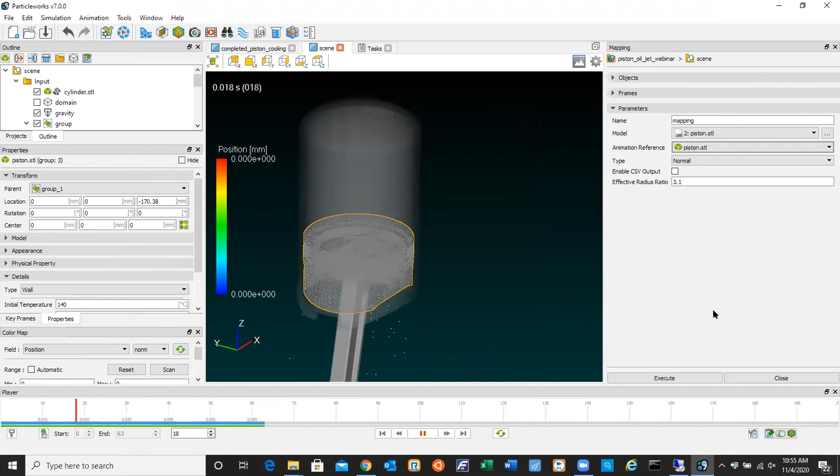And I think the nice thing about what Chris is showing here is that we can do kind of quasi post-processing or actually even full post-processing while the simulation is still running. So it's not like we have to wait for the whole thing to finish before we were able to get results. And then, half of the battle is making sure that you set your material properties right, as an example. So by being able to get that rapid feedback, you're able to sanity check the numbers you're getting and make sure that you're not running a simulation that was set up incorrectly.

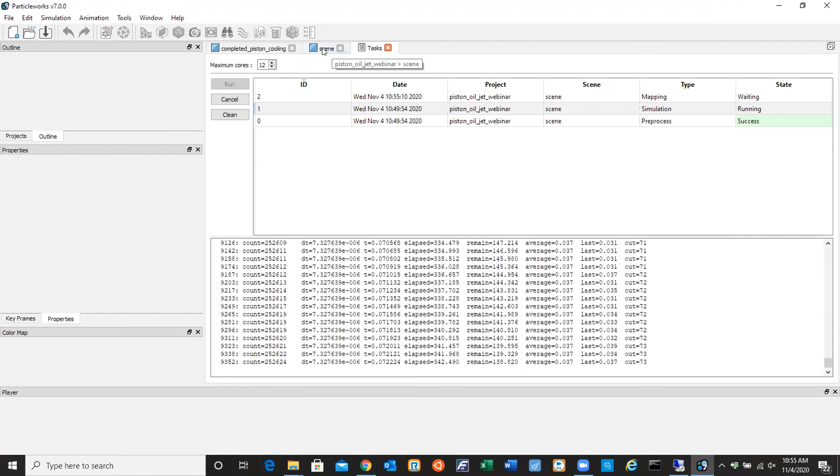Yeah, I think that's a good point to make there, James. And I went ahead and started up with some mapping post-processing. Nice thing about Particleworks, it queues it up, and so once this simulation is done, it'll go ahead and kick in that post-processing, which this simulation should be wrapping up fairly soon. So we might see that before everybody has to go. But in case we don't, let me turn this off for a second. We'll see some mapping results that I've done previously. This is post-processing for temperature values.

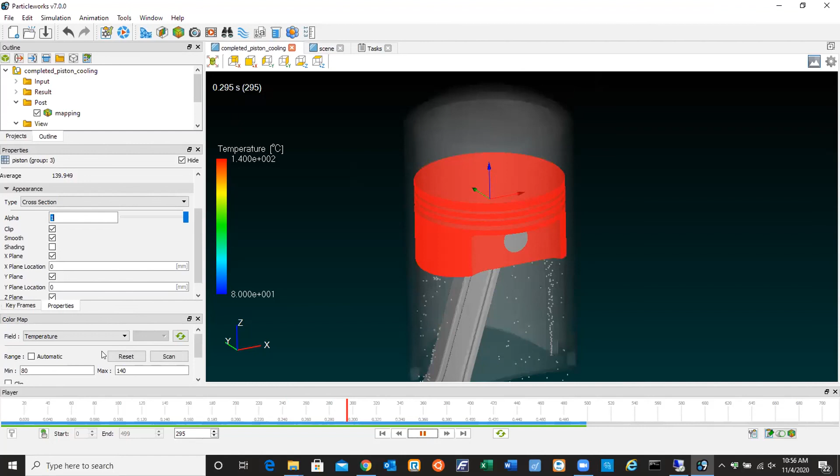See a little bit here. So this is a step where we're essentially taking the geometry and mapping or taking the average of its neighboring particles at a given point, and then graphically applying that to the surface of the geometry. And in a lot of cases for certain geometries, that can be a lot more useful of a way to ingest information rather than just looking at the particle values and the colors of those particles.

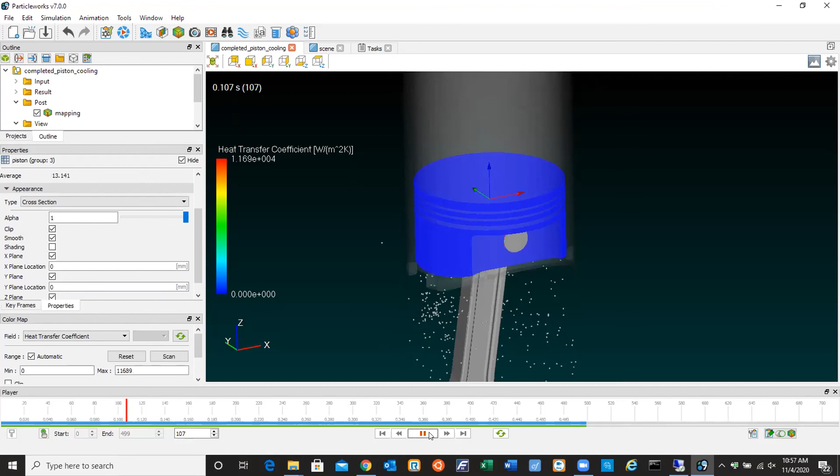So I think that wraps up most of the content that we wanted to show.